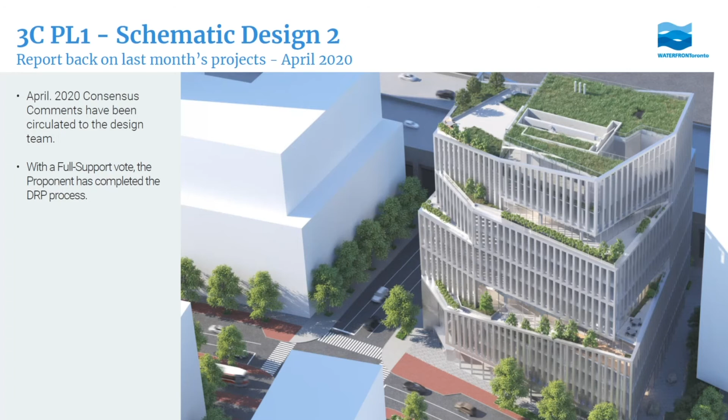Next slide, please. And the Port Lands flood protection, the parks, that was also a detailed design review. And we also gave them a vote of full support. So again, they won't be coming back to the panel because they have finished the process.

The only caveat there is if something changes dramatically again, because this project has had to change a couple of times in response to geotech conditions discovered during excavation. So if there's a big shift, it has to be addressed, I hope there isn't, because we're going to run out of budget for this, but hopefully we don't have to do another redesign. If we do, we'll bring it back, but if not, I think they are also finished.

So good, we gave 2 thumbs ups to final projects last time. Next slide. And then I wanted to talk about Quayside.

I'm not going to read what's here, but this is some excerpts from the statement that Steve Diamond made. I think Sidewalk has decided to pull out of the Quayside project.

It's disappointing on a number of levels. I feel that as we worked through the process with them, the project was getting more and more shaped into something that we were starting to feel really excited about. I feel like we were addressing a lot of the privacy concerns, and at the same time getting the public realm proposals much better aligned with Waterfront Toronto's position on public realm.

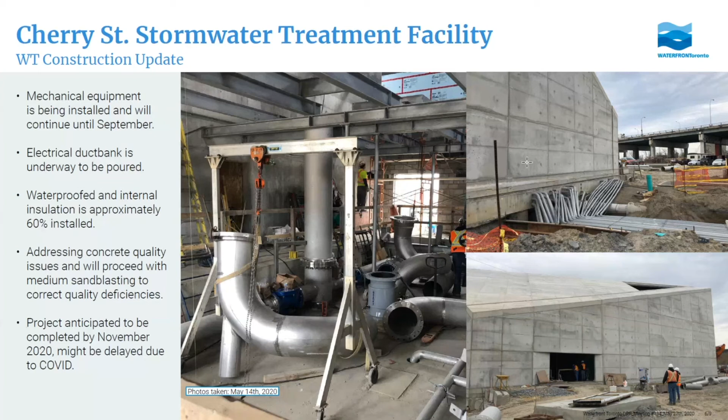And this was something that was actually recommended by the panel that we pilot this. And Sonia on our team has actually worked really hard at getting us some grant funding for this and getting city staff through the approval process. So while it is small, it has been a pretty significant feat. I'm actually very excited that we're testing this out.

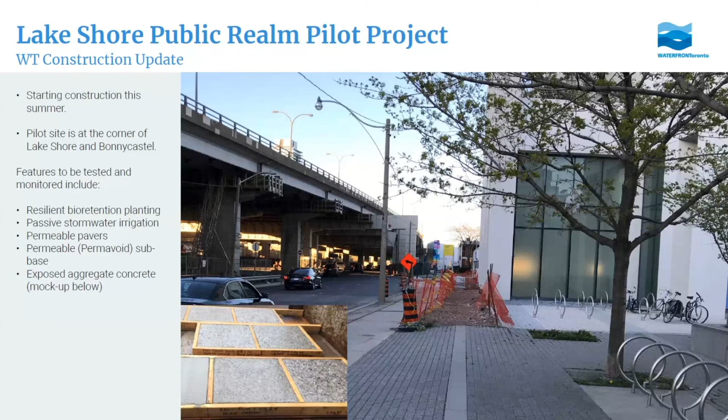For the Contact photography, we were lucky enough to be selected, or who was selected was Vid and Ryan, who are the two photographers we hired to photo document the whole PLFP project. There's a large-scale temporary public art installation meant to go up on the Essroc silos and the median along Villiers. Unfortunately, the real-life version of this exhibit has been postponed because of COVID. The Contact has created a website now for all of the exhibits so they can all be experienced virtually.

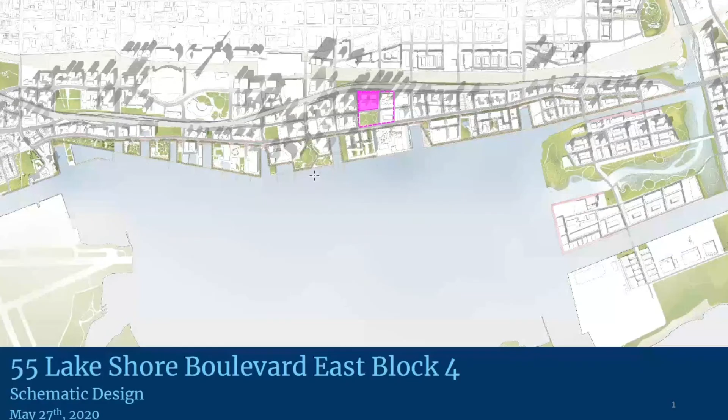Okay, so over to you, Carolyn, if you're ready. Good morning. My name is Caroline Kim, and I am the Urban Design Project Manager for Waterfront Toronto. Today's project discussion will be on Block 4 for 55 Lakeshore Boulevard East. The proponent is Menkes, and the design team includes Architects Alliance, NAK Design, and GBCA. This project is in the review stage of schematic design. I also like to note from the city, I have Nader Kadri, who's the community planner for this application, and Ran Chan, the senior urban designer. Next slide, please.

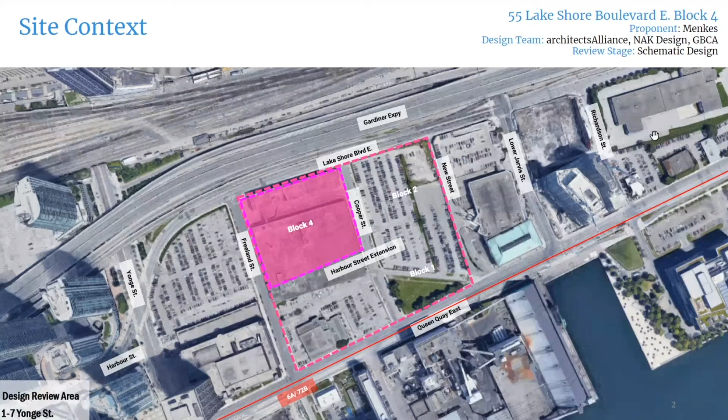Block 4 is located between Lakeshore Boulevard East to the north, Cooper Street to the east, the new Harbor Street extension to the south, and Freeland Street to the west. It is the final of the 4 blocks, with Block 1 located in the southeast quadrant, Block 2 in the northeast quadrant, and Block 3 in the southwest quadrant, which will be the city-owned park. Next slide, please.

Block 4 is known as LCBO lands for housing the existing LCBO building, and that is listed under the Heritage Register. The proposed massing is in accordance with the approved settlement in 2018 and is in full compliance with the site-specific zoning bylaw. Block 1 came to the DRP last November 2016, and Block 2 was not reviewed. In terms of the project timelines, in September 2019, an OPA and zoning LPAT order was issued. In September 2019, the SPA submission. In the first quarter of 2022 is the target construction start, and 2027 is the target construction end, which is approximately 5 years. Next slide, please.

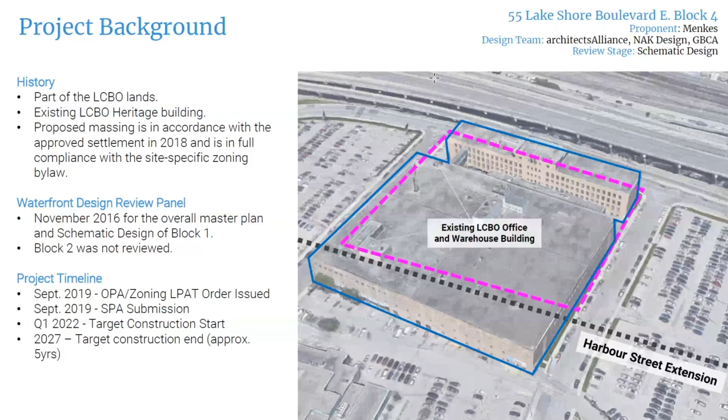In terms of the project background for Block 4, with regards to the towers, there are 3 residential towers with a height of 79, 87, and 90 stories, 2,705 market units, and 196 affordable units. The towers are set on top of 2 mixed-use podiums with various preserved and reintegrated elements from the existing LCBO office and warehouse building. With regards to the podium, the north podium contains the residential lobbies and amenity spaces for the market condo units and the affordable housing units.

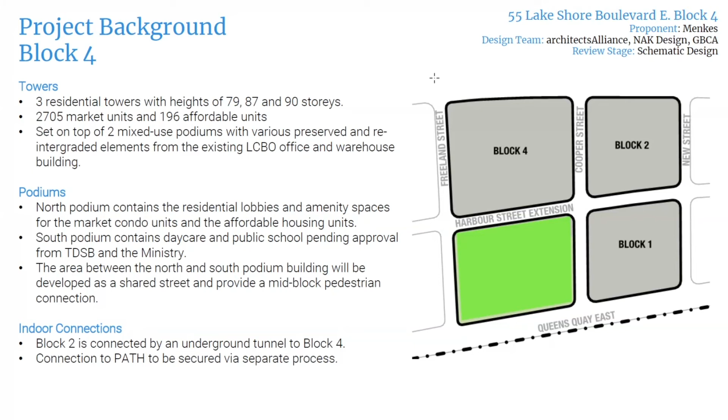The south podium contains daycare and public schools, which is pending approval from TDSB and the ministry. It should be noted that TDSB will require approval from the Ministry of Education with regards to not being able to meet the requirements of providing exclusive outdoor use. The area between the north and south podium buildings will be developed as a shared street and provide a mid-block pedestrian connection. In terms of the indoor connections, Block 2 is connected by underground tunnel to Block 4, and there is a connection to the PATH to be secured via separate process. Next slide, please.

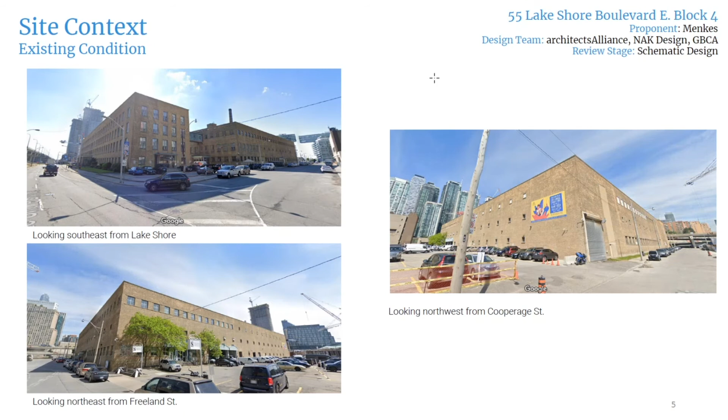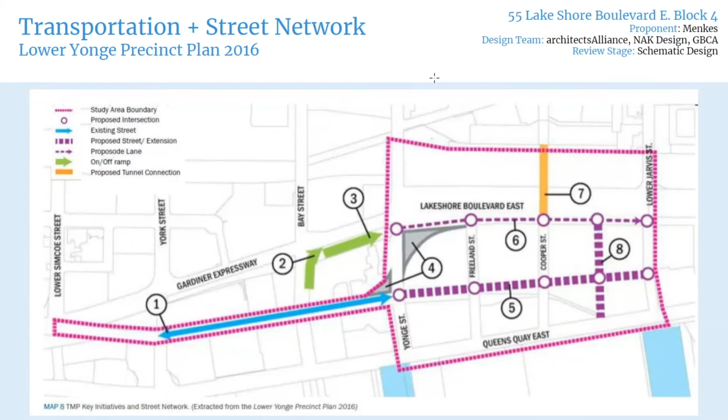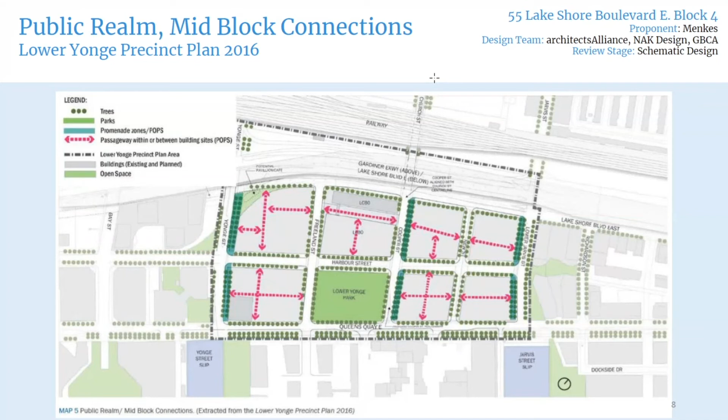And this is again from the Lower Yonge Precinct Plan 2016, the public realm with mid-block connections. As you can see in Block 4, there is the Heritage Mews that is being proposed between the existing 2 buildings, the warehouse and office. Next slide, please.

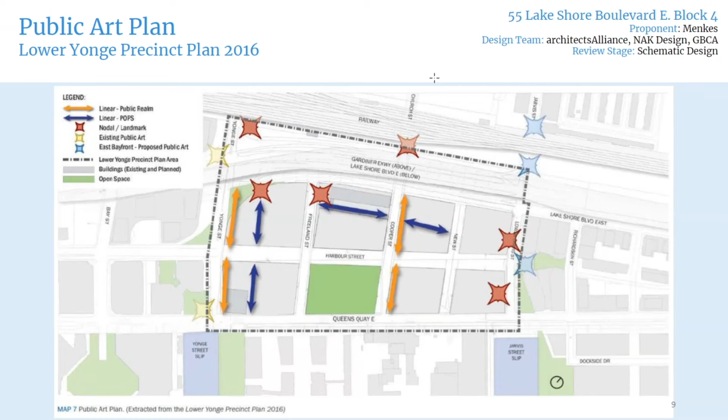Public art plan, again from the Lower Yonge Precinct Plan, allocates nodes and areas of public art to be considered. Next slide, please.

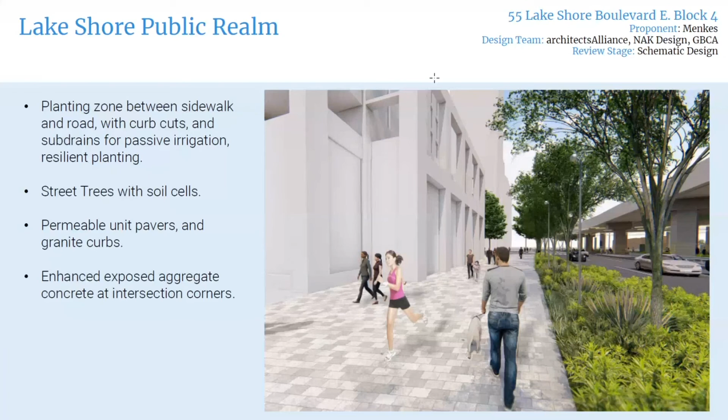And this is the Lakeshore public realm. The planting zones between the sidewalk and road with curb cuts and subdrains for passive irrigation and resilient planting. The street trees with soil cells, permeable unit pavers and granite curbs, and enhanced exposed aggregate concrete at intersection corners. It should also be noted that this is the ultimate condition and that this is being led by a separate process with Waterfront Toronto and the city.

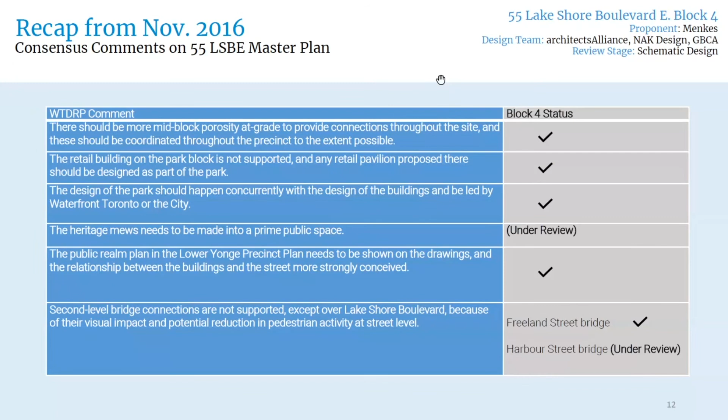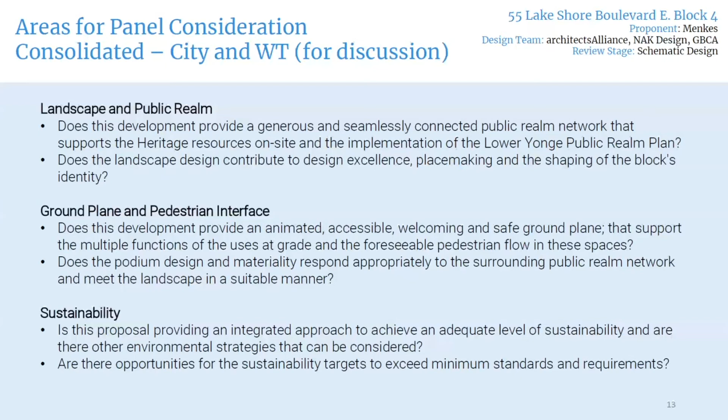And now I will turn it to Peter Clewes from architectsAlliance. Thank you, Caroline. So I'll try and go through this quickly—there's a lot of information here. I also have with me today, virtually, Craig McIntyre from EQ, Sabella from NAK, and Chris Boigel for Heritage. So as Caroline said...

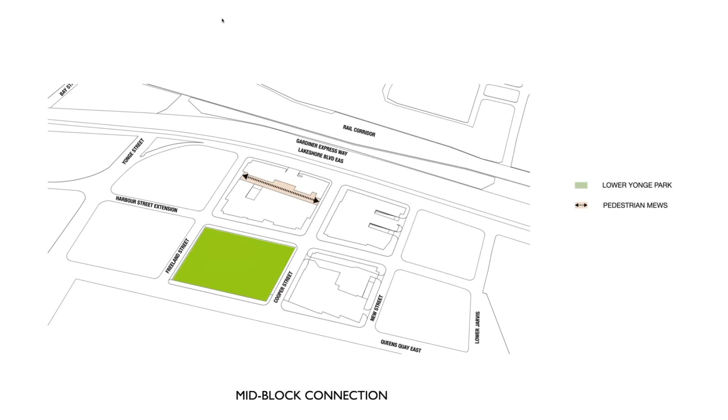This was last reviewed 4 years ago, which is quite extraordinary—it was the master plan development. Subsequent to that, we made a series of changes on that master plan, the principal one being, as Caroline said, the introduction of the pedestrian mews from Freeland to Cooper Street.

Just by way of context, because it's been 4 years since the panel, and some of you were on the panel at that time, some of you were new, I just want to give you a bit of context in terms of what the precinct plan called for.

It asked for a balance of residential and non-residential uses, including employment, with at least 25 to 40% non-residential. Harbour Street would be designated as a principal retail street, with a mix of residential unit sizes, tenure, and affordability. That is all being done now: there is an office building under construction on block 1.

There's a school going in, there's affordable housing and so forth, which I will get to. The other tricky part of this project is the interconnection with the path system, limiting connections at grade or below grade with the exception of Lakeshore.

In terms of the path system, as Caroline mentioned, we are proposing an over-street bridge on Freeland. That's because there's a community center being built in the Pinnacle project to the west, and the school intended for block 4 needs to share those community facilities such as gymnasiums. The school board and other officials feel it's paramount that there's a bridge there, so it's currently shown on our design.

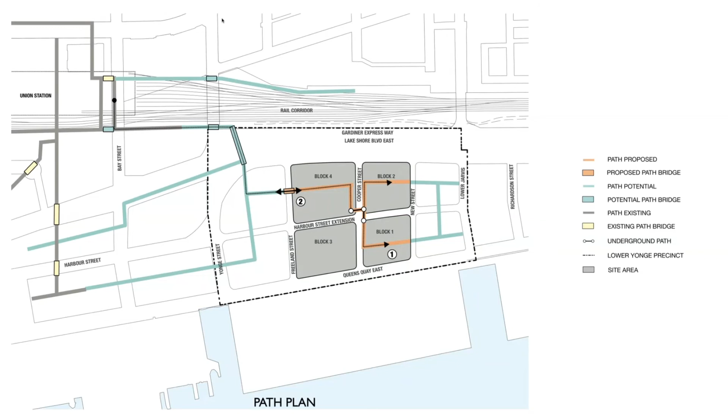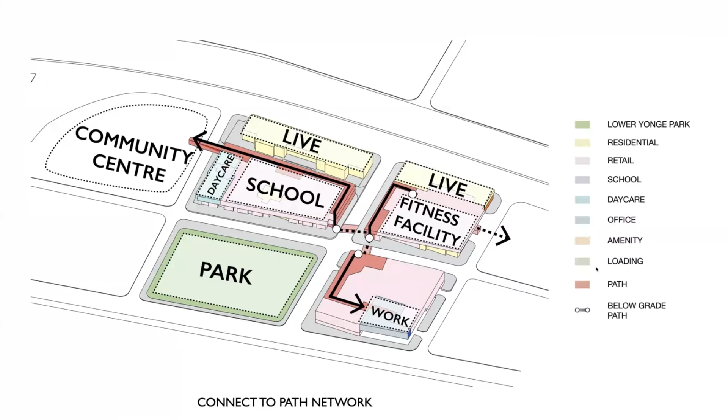So really the way this works is you come in from the west, above grade, notionally on the 2nd floor, you move eastward across block 4, and then you take an escalator down to grade and below grade. You can either transit across Cooper at grade or below grade into block 2, where you pop back up, or you stay down and pop back up into block 1.

Also part of the context, this was all laid out in the precinct plan in terms of base building heights and articulation of those base buildings and pedestrian weather connections and so forth. These are the heights we're proposing in all 3 blocks that comply with those base building heights, ranging from 17 meters up to 38 meters on Lakeshore Boulevard.

Then there are tower heights and transitions that the precinct plan asked for, generally a height transition down as you move eastward and southward. The tower locations were already largely determined by the precinct plan, 3 on block 4 and 2 on block 2. These are the proposed heights, from a height of 299 meters down to 219 meters on block 2.

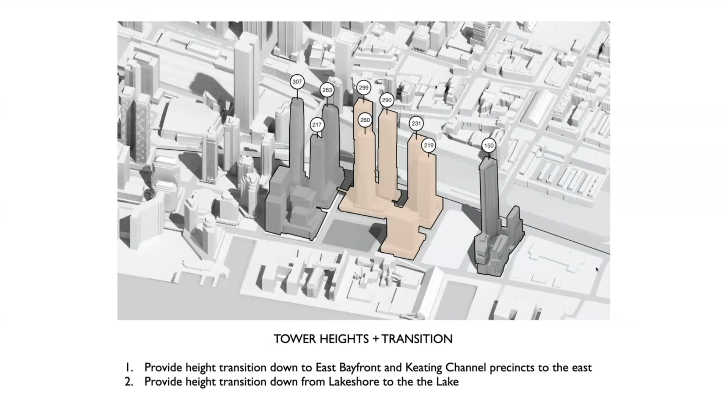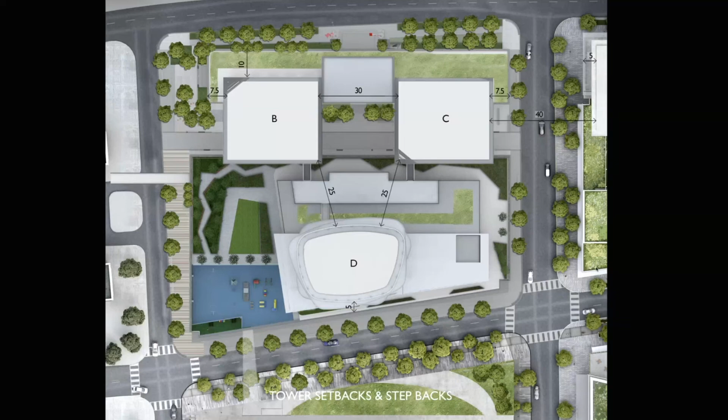Tower setbacks, step backs were required from Harbour, Lakeshore and Freeland, and also 10 meters from any heritage structures. So focusing on block 4, essentially what we're proposing here are 3 towers: towers C, B, and D.

Towers B and C, which are the taller of the 3 towers, are proposed to be separated by 30 meters, and then a 25-meter tower separation to the tower to the south, which is lower and fronts onto Harbour Street.

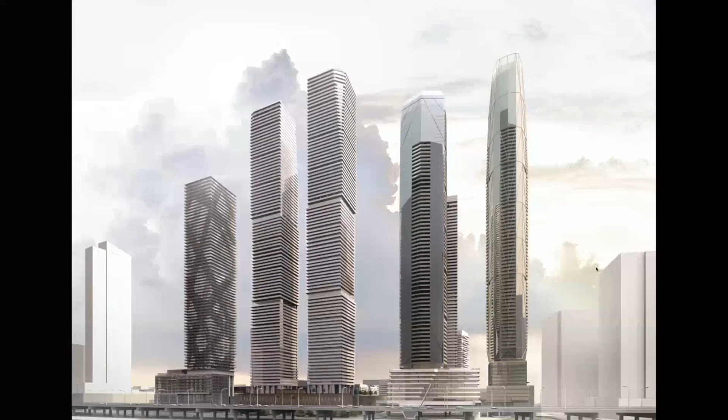This is a massing diagram shown in context with the Pinnacle development to the west, showing the various heights of the buildings, from the southeast looking northwest. You can see the 3 towers proposed adjacent to the Pinnacle development, and then the 2 towers currently under construction on block 2, the ones with that kind of graphic pattern on the balconies, and of course the office buildings under construction.

Another precinct plan requirement was that loading access be limited to Freeland and the so-called New Street, which is the street on the east edge of the precinct, and to limit that loading access to 6 meters and minimize the number.

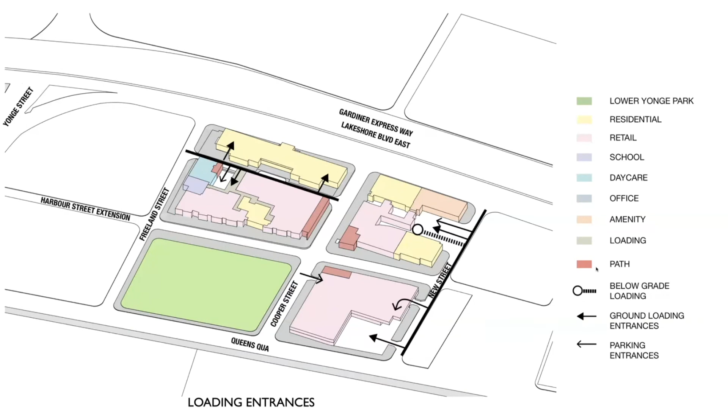So what we're proposing is to have the principal loading, which is now currently under construction, below grade, accessed from the east side of block 2. Trucks drive down a ramp, and there's a whole below grade loading area servicing blocks 1 and 2, and also block 4. Block 4 also has some limited loading and vehicular parking access off the heritage mews, which I'll show you shortly in some plans.

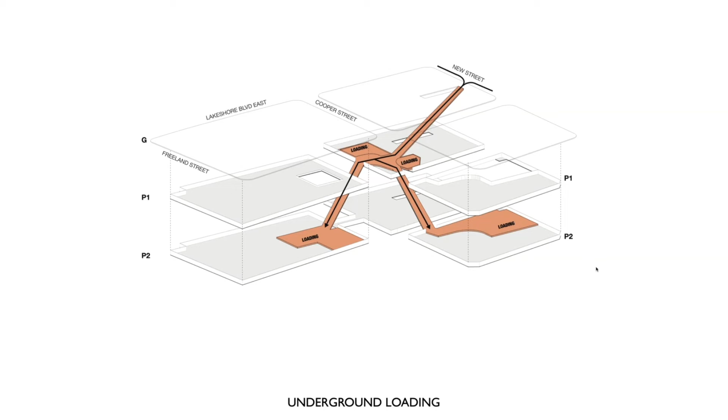This basically just shows you a schematic of how that works. Trucks come down New Street on a very long ramp. There's a principal loading area under block 2 at the P1 level. Trucks can also continue down to the P2 level under block 1, the office building, as well as P2 under block 4.

There were requirements for ground floor animation, activated uses at grade, a series of minimum percentages of building faces, minimum ground floor heights, minimum widths for lobbies, and facade articulation, which I believe we are adhering to. You guys will be able to judge that.

In terms of the overall organization of the precinct, the pink areas are publicly accessible retail areas. To the extent we can, we've put all the retail on Harbour Street and on either side of Cooper Street. Lakeshore Boulevard is the light yellow area for residential lobbies, as well as limited lobby exposure on Harbour and on New Street to the east. The last area is a daycare and a school, which have access off Freeland Street on the west side of Block 4.

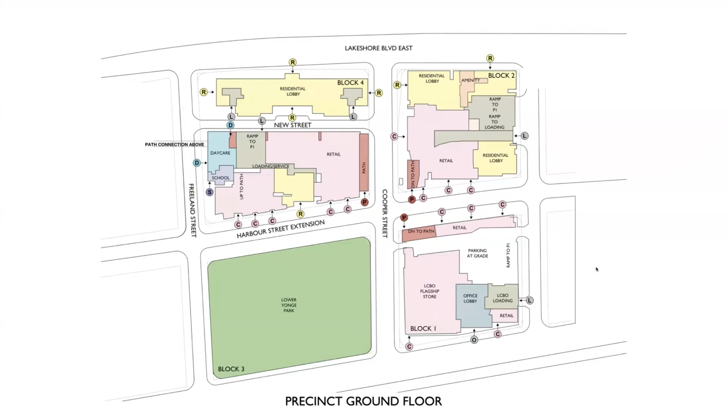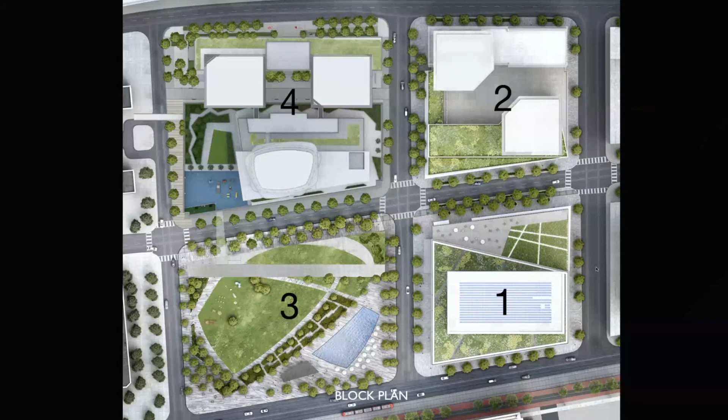This is a composite aerial rendered view of the four blocks with the park. As Caroline said, the retail pavilion proposed four years ago on the southern edge of Harbour Street, adjacent to the park, has been removed. That parcel of land has now been vended back to the city to expand the park, and there's potential, still under discussion with the school board and others in the city, for a bridge leading from the school to that park, though that's yet to be determined.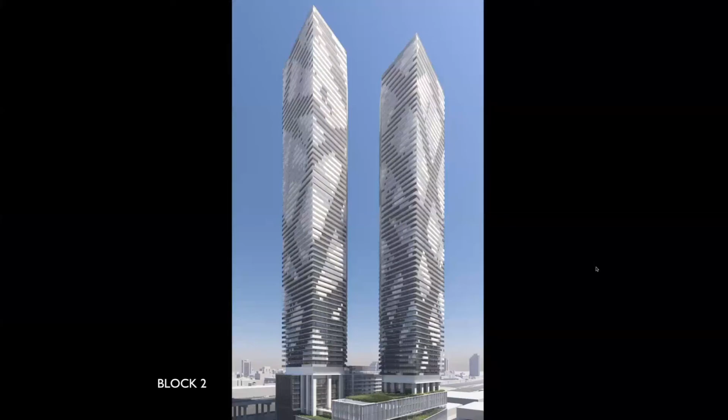What's under construction now was approved with Block 1, the office building — I think the superstructure is largely completed. Block 2 is a project we're doing that's under construction, with the podiums currently at about the third level structurally, so there's a long way to go. And so on to Block 4.

As Caroline said, one of the challenges of this block is that it's essentially completely occupied by two heritage buildings, complicated further by the alignment of Harbour Street, which is essentially taking off the southerly third of that warehouse building. So let me give you an idea graphically of how this block is organized, because it's a very complex set of different uses.

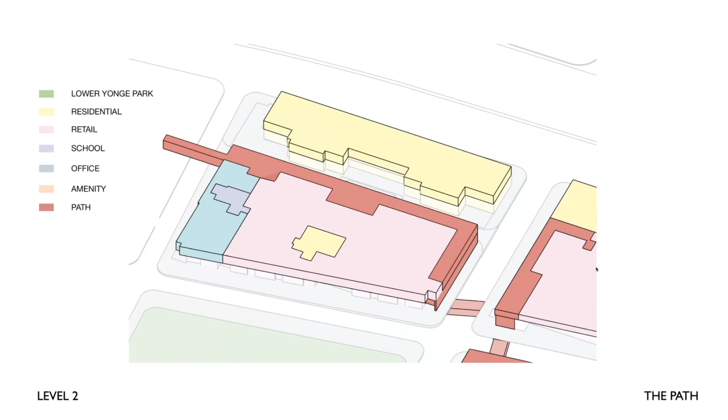We have residential lobby uses at grade, wrapped around with retail, then a school entrance off Freeland Street and a daycare to the north of that. The path connection comes through on the second level of the podium, also with second level retail, the school, and second level residential. The school really starts on the third level with residential to the north, amenity on the fourth level with residential to the north, and then the residential towers above.

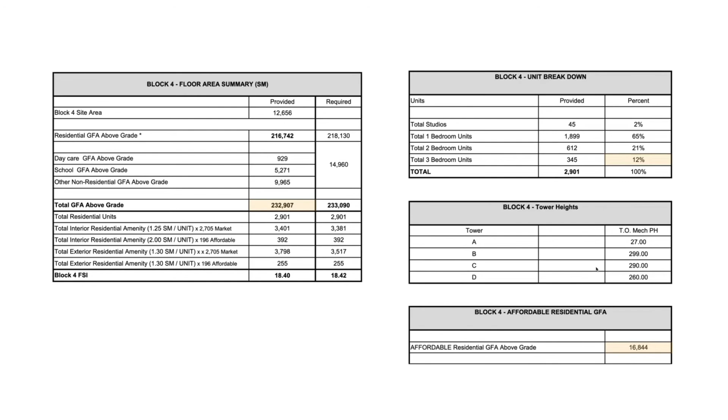I won't get into this — statistically, a lot of this has been dealt with already. Suffice to say that the entire project density on this block proposed right now is about 230,000 square meters. So it's a very, very large project.

These are more detailed floor plans showing the organization of the block. We're proposing a ramp down to P1 off New Street, a heritage mews running between the two heritage buildings. We're also proposing a loading dock — labeled L on this drawing — three loading docks total, two on the north side and one on the south. There's a residential lobby entrance to the north building and retail exposure on the south end, as well as the daycare wrapping around. We're trying to animate all the ground floor faces of these buildings, particularly on Harbour, Freeland, Cooper, and the heritage mews, as much as programmatically possible.

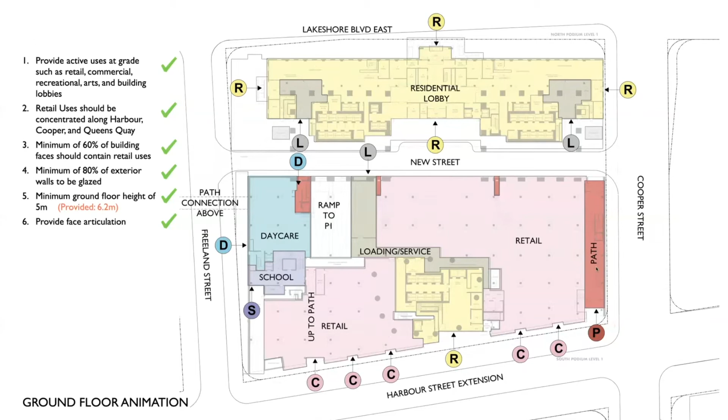So, ground floor plan: retail, daycare. I'll go through this quickly since it would take hours to cover properly. Second floor with retail — the daycare occurs on the second floor at the west side with an exterior play area adjacent, and the path bridge connects into this from the Pinnacle development to the west. There's a path connection that transits along the north side of the podium, then turns south and goes down a set of escalators to grade. There's also an original heritage bridge we'll be maintaining that connects back to the existing heritage structure to the north, currently LCBO's corporate offices. That building will be converted into an affordable housing project, with the residential cores of the two towers punching through it.

Up on the 3rd floor is the elementary school that basically runs around the perimeter of the building, with an exterior play area carved out in the southwest corner. The interior of this plate, because it's very deep and not particularly useful for the school, will be given over to residential storage. Again, to the north is the affordable housing project.

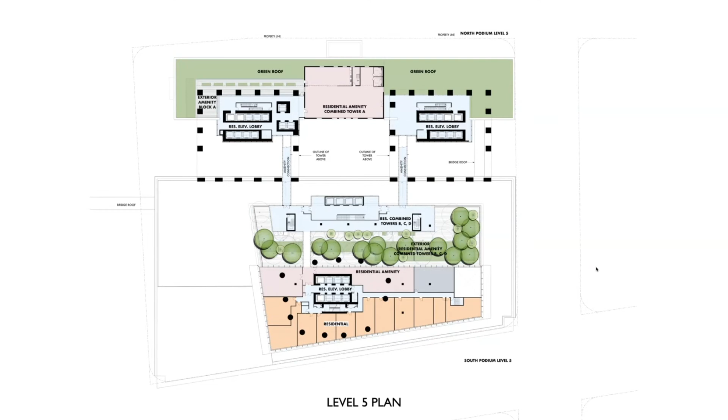When you come to the 4th level, there's a combined residential amenity area for all 3 towers, indoor and exterior, with a series of bridges that connect back to the towers to the north over the Heritage Mews. Level 5 has more residential amenity as well as some residential to the south, completing the podium on level 6, and then we move into the towers. The tower separation distance is 30 meters to towers C and B, and 25 meters to tower D.

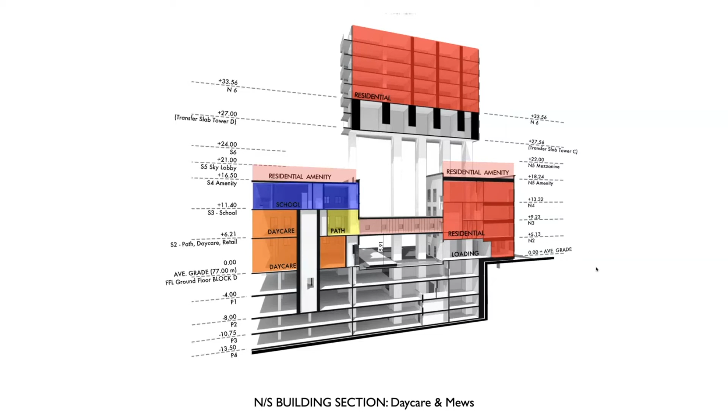These are isometric, diagrammatic sections trying to help you understand the complexity of this project sectionally. This is looking through the Heritage Mews Street, looking west. You can see the Heritage Bridge connecting into the residential to the north, which will occupy that LCBO building, and then the various facilities, daycare and so forth, to the south.

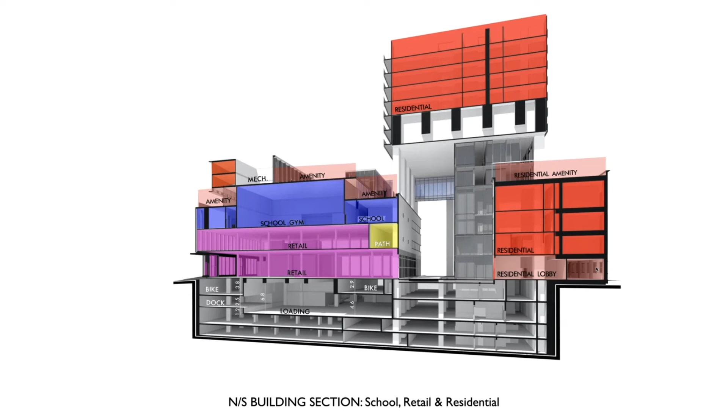Suffice to say, where the towers come in on the north, what we're trying to do is lift those up as high as possible to allow the heritage buildings to read volumetrically and visually. We're putting in a massive transfer system, two stories high, above those buildings to transfer the tower structure down into a more organized column structure that will go through. To the extent possible, we're trying to create as much visual and physical porosity through the Heritage Mews.

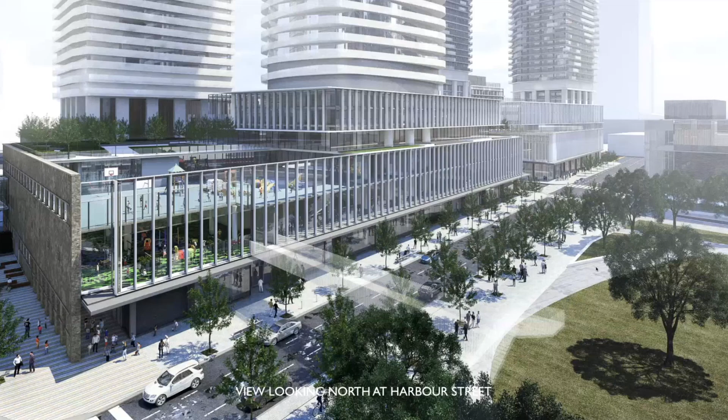Now, coming to the overall architectural expression, because we're dealing with most of the facades of this block being heritage facades, there's very little intervention we can do, and I'd be interested in the panel members' comments on that, because we are proposing some minor interventions, particularly on the south face, because that facade is being removed.

We've chosen to essentially glaze the entire southern face of this building to really make a clear visual delineation between what is new and what is existing in terms of the heritage buildings.

The potential bridge has been ghosted in over Harbour Street. That's a bridge of some discussion with TDSB and others, whether it should be in or not, or whether there should be a crosswalk at grade on Harbor, and I'll leave that to others to decide in the fullness of time. This also shows, on the southwest corner of the building, where we're carving out exterior areas both for the daycare and the elementary school on the 3rd floor.

Just a more detailed shot showing continuous weather protection for the retail at grade. Again, what we're trying to do here is create as much transparency and animation as possible to the southern face, with 2 levels of retail.

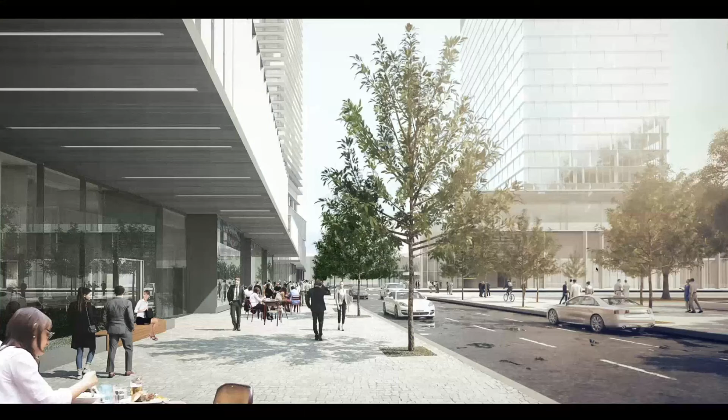Just viewed from Harbor, to the south of the park with your back to it. Again, the bridge ghosted in, the potential bridge, and the continuous weather protection with a widened sidewalk along the north side of Harbor.

Then coming around to the eastern side of the block, the heritage facade makes an appearance. What we're proposing here, if you recall, is where we're having proposed escalators coming from the path down to grade and then continuing down below grade. We're proposing a series of openings in that warehouse facade at grade to try and create a greater sense of visual porosity to this facade.

It's a very opaque, almost rationalist facade from the 40s or 50s, so again I'd be interested in commentary on whether that's a good thing to do or not. These are just more detailed elevation drawings showing how we're proposing to do that.

Similarly, on the west side of the block, we have the proposed entrance to the elementary school. We're proposing here to carve into that facade with a series of almost colonnaded openings, to create more visual and functional porosity through that facade into the entrance of the school, as well as the daycare to the north. Sabella will get into the whole ground plane treatment proposed here in a moment.

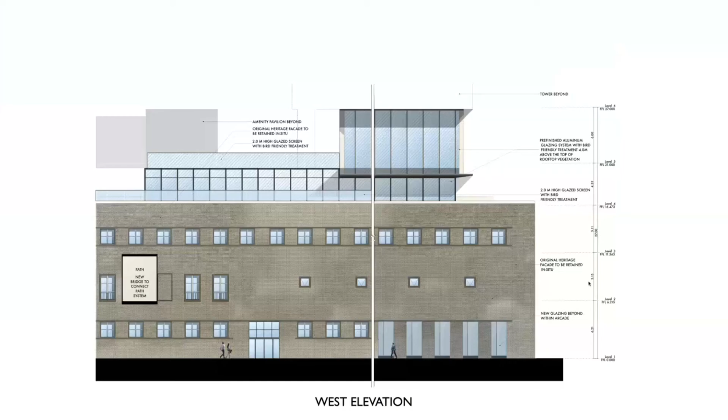Accompanying elevation drawing, looking down the heritage mews, what we're trying to show here is, to the extent we can, given the very, very large buildings, how we're trying to, as gracefully as possible, transfer the structure of these 300-meter buildings down and thread them through both the heritage buildings and the mews running through.

You can see on the right-hand side of the image, the bridge coming in from the Pinnacle development to the west, accessing the school and daycare and the path connection. And you can also see the heritage bridge that we are reinstituting, threaded through the columns of the tower above.

This is more, and Sabella will talk about this in a moment, a whimsical idea for the northwest corner where there's a wider public realm given the existing setbacks of those heritage buildings. There's a possibility for public art here.

As you complete the tour around the block and come to the northwest corner, the LCBO office building's facade will be completely retained and restored. The windows will be reconstructed and form basically glazing for the affordable residential housing project.

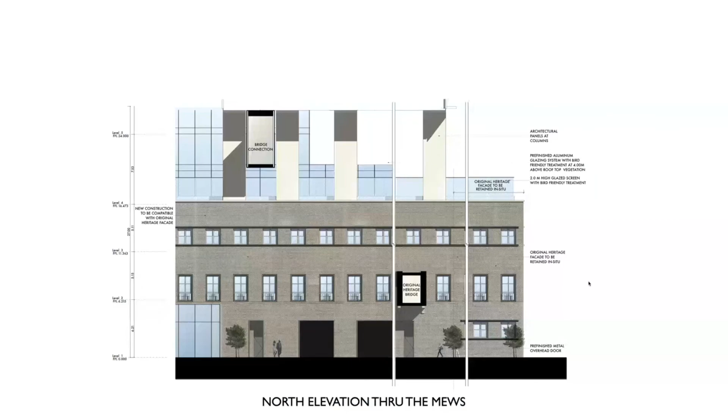Then finally, going through the heritage mews, what we're trying to do here is animate it as much as possible. This is the residential lobby entrance into the LCBO office building from the north side.

So there would be a residential drop-off here. As well, on the north side of the warehouse building, we're trying to open up the retail so that it has entrances and visibility into that laneway.

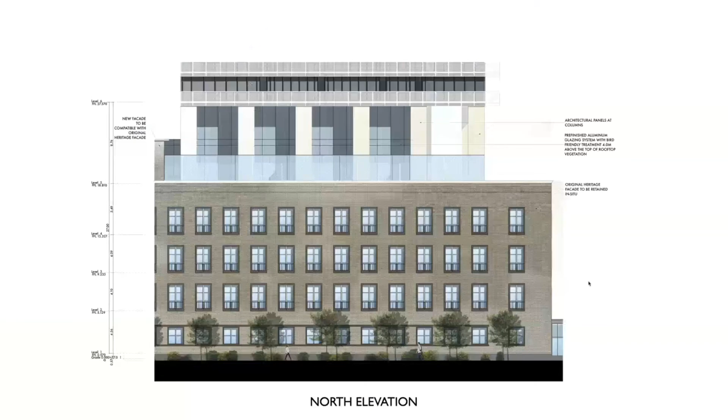So I'm going to now turn it over to Sabella, who will talk about the public realm design, and then I'll come back to sustainability.

Sabella, are you there? Yeah, I'm here. I can be your slide changer for you.

Okay, great. So for the most part, the boulevards within this precinct have been designed according to the Lower Yonge Precinct Concept Plan, incorporating wide pedestrian clearways, street trees, furnishing zones, and waterfront standard concrete paver.

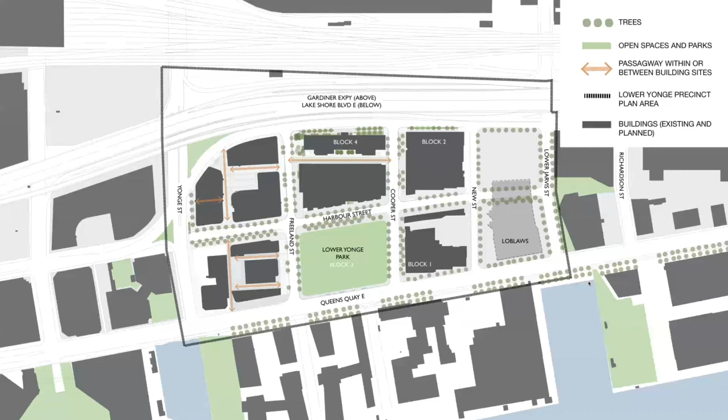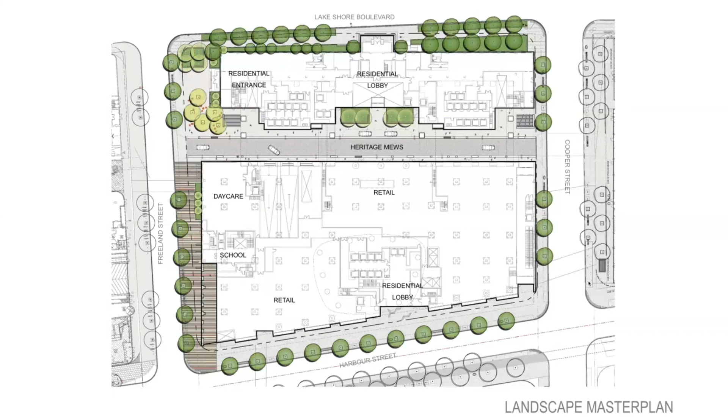Harbour Street along the south of this block will have a 5.25 meter pedestrian clearway and a single row of trees. Along Cooper Street, because of the heritage facade, the clearway is only 2.1 meters, with a single row of trees. The entire boulevard will be paved with the gray Silex waterfront standard paver, as specified in the Lower Yonge Public Realm Concept Plan.

Along Lakeshore, we followed the vision from the Gardiner East Public Realm Study and have incorporated wide, long planters against the curb and porous permeable paving. The space along Lakeshore varies, with about 6.5 meters at the west end and just over 11 meters at the east end, so it's quite tapered. In the center, where the entrance is, the canopy and walkways create a very narrow area.

So we've introduced a 2.1 meter walkway that works around the entrance and heads west towards Freeland Street. On the south side, we've added planting. On the east side, we've been able to add a second row of trees. And on the west side, we've added larger shrubs and understory planting.

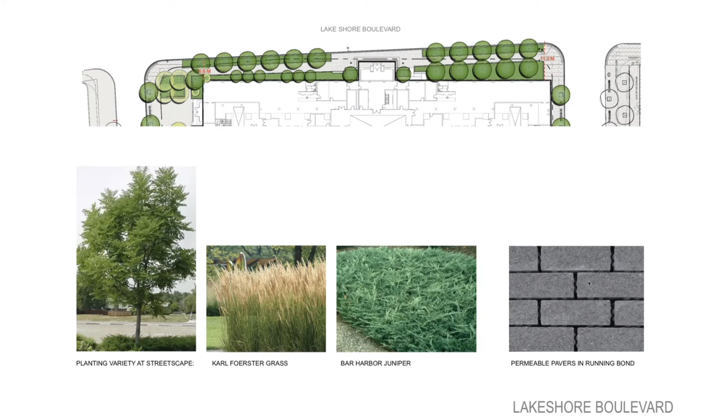So along Freeland Street, we have a variety of relationships here. At the north end, there's close to 18 meters from the building face to the curb. Further along the south building, the setback varies from about 6.5 meters at the south end to 10 meters at the north end. According to the guidelines, this area is to be paved in concrete, and we feel there's a lost opportunity here. We feel there are some really great spaces here, and that better paving would certainly help animate this area.

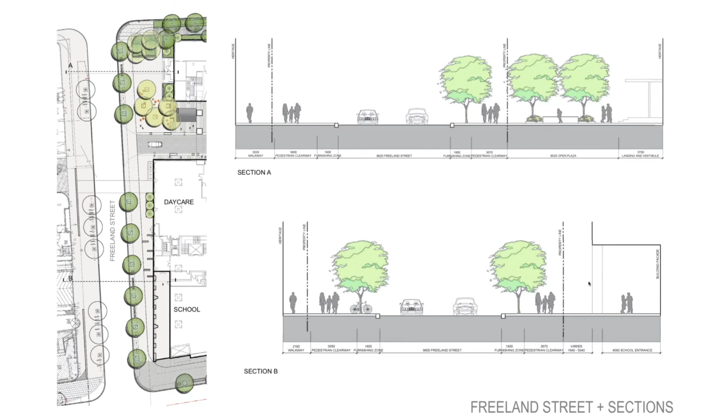So at the north end, we feel this could be a great little plaza. We've added a big planter at the north end to shelter it from Lakeshore, and then added a grove of trees with movable chairs and tables to create a flexible area for lounging. We feel this is a great place for art to occur, and we'd like to introduce a light gray mottled paver to create more character in this area.

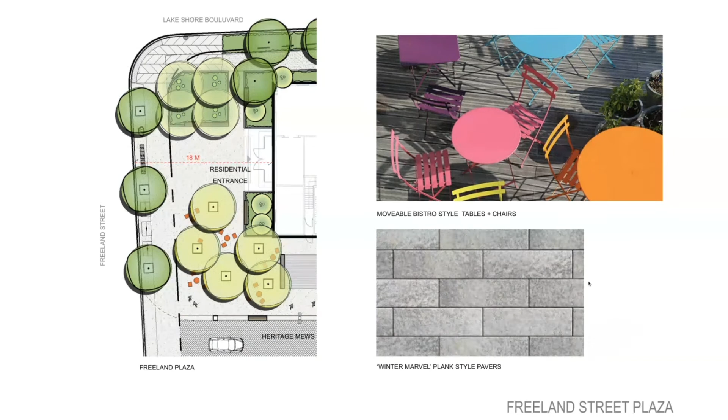The southern part of Freeland has a more dense facade with smaller windows, yet it contains the opening for the entrance of a daycare as well as a school.

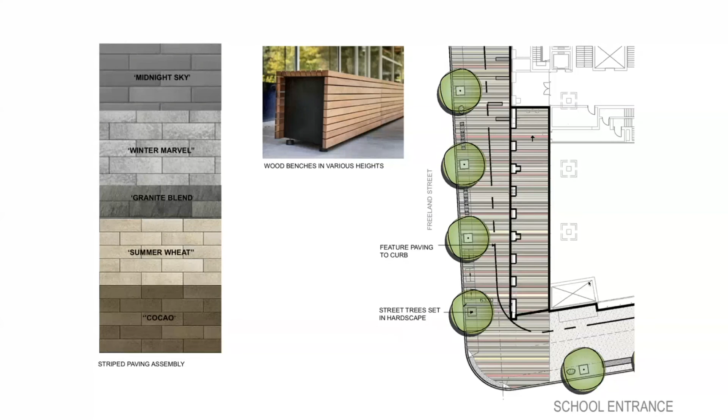We wanted to help animate this area with striped paving to create a more interesting zone. We feel those stripes could be useful in penetrating through the openings in the facade to announce where the school entrance is. This paving would be playful and indicative of the school zone, and we'd like to carry it further south to Harbour Street to the curb, possibly extending it to show a school crossing to the park. Along this frontage, we've also introduced wood benches of varying heights for school children and parents to gather.

We feel the Heritage Mews can act as a great woonerf-like experience and provide the mid-block connection between Freeland Street and Cooper Street. There is a designated driving zone in the center, 6 meters wide, defined by special pavers. On the edges, there's a furnishing zone with concrete planters and lights to help keep cars within that space. Pedestrians will be free to move wherever they like within the space, so it'll be a shared street. On the right, you can see the image of the light we are proposing along this stretch.

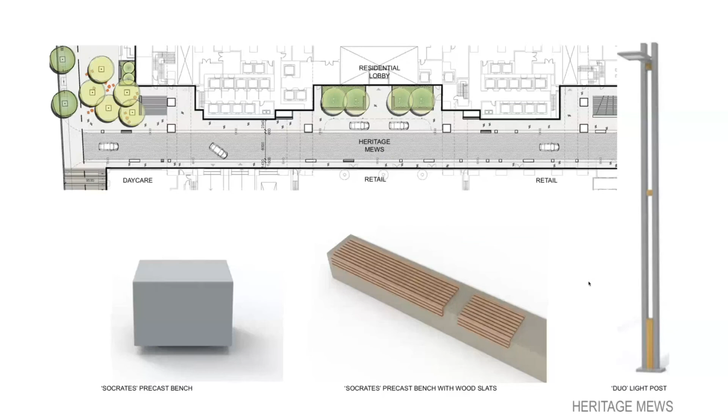These are different types of pavers. We are introducing a herringbone pattern in the driving lane, a wider, darker charcoal band along the furnishing zone, and then that lighter paver suggested earlier for the plaza would extend through the whole Mews, defining the pedestrian area.

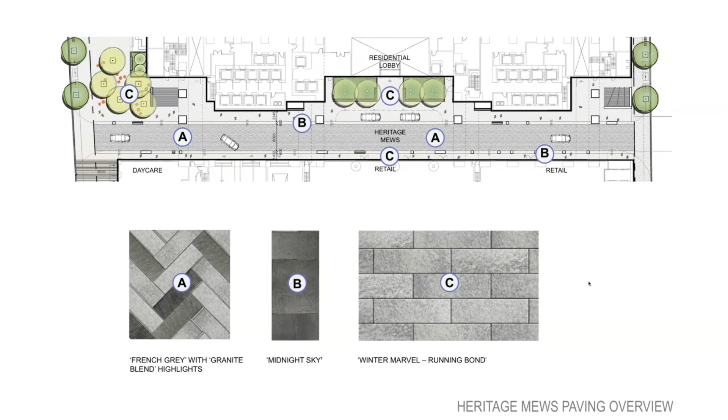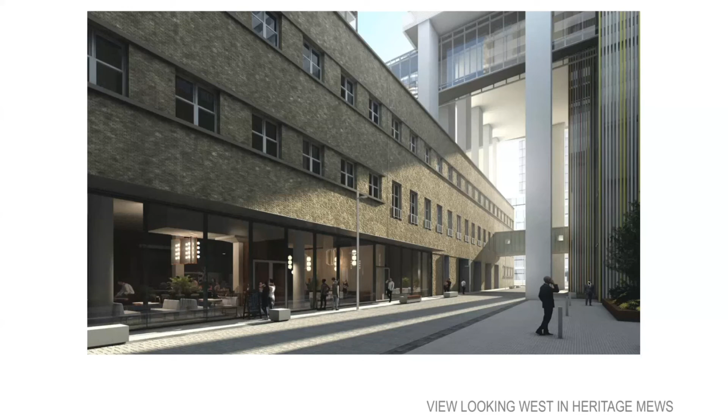This is a view again looking west through the Heritage Mews at the retail area, showing the benches and the light standards.

In the center of the Mews on the north side is a residential entrance, and there will be sunlight in this area in the summer months, late morning and early afternoon. We've introduced large planters to provide more of a residential feel here, and extensive benches along the front. The planting will be blue beech trees and shade-tolerant shrubs and understory plantings such as hostas and Japanese fountain grass.

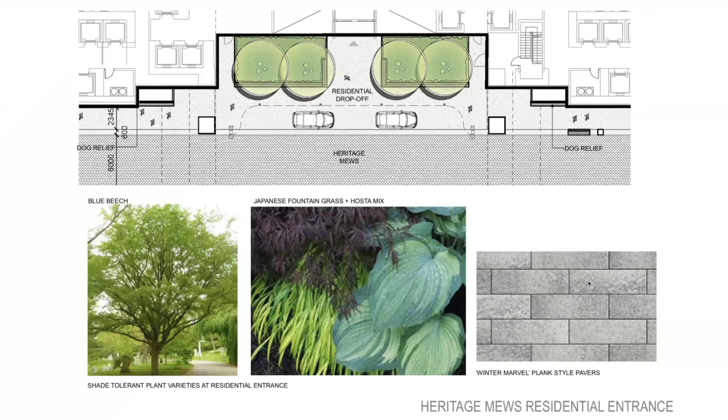Here's a view showing that entrance with the Japanese fountain grass and the benches in the foreground.

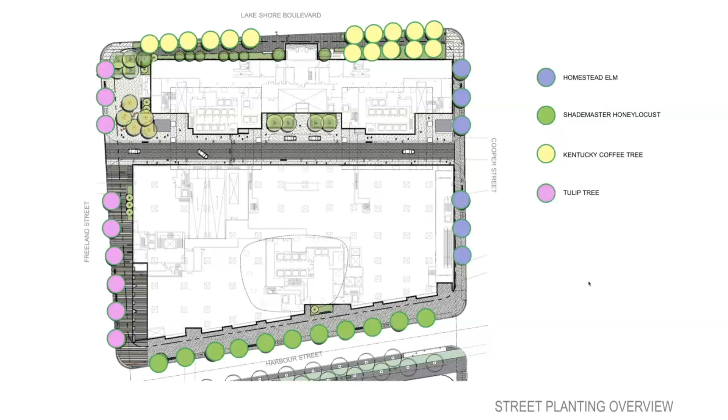The strategy for the street trees is to try to have a monoculture on each street. We're looking at homestead elms on Cooper Street, Kentucky coffee trees along Lakeshore, tulip trees for Freeland Street, and shademaster honey locust for Harbour Street. We'd also like to introduce river birch within the plaza that people can sit underneath.

Peter, that's the end of my presentation. Thanks, Sabella. So I'm going to briefly take you through some points put together, particularly by Craig McIntyre, on sustainability, but then Craig will be available for questions and comment as we go through.

From a sustainability perspective, our client is proposing to achieve TGS version 3 tier 1, meeting the bird-friendly requirements of tier 2, and somewhat influenced by Waterfront Toronto's minimum green building standards, including electric vehicle infrastructure, cycling, connectivity, and green roofs. They are looking at connection with the Enwave District Energy, though no decision has been made at this point. The building will have all suites sub-metered as part of a smart building using high efficiency appliances, bird-friendly glazing in the lower portions of the building, long-term flexibility in terms of ground floor heights and structural design, and 3-stream recycling.

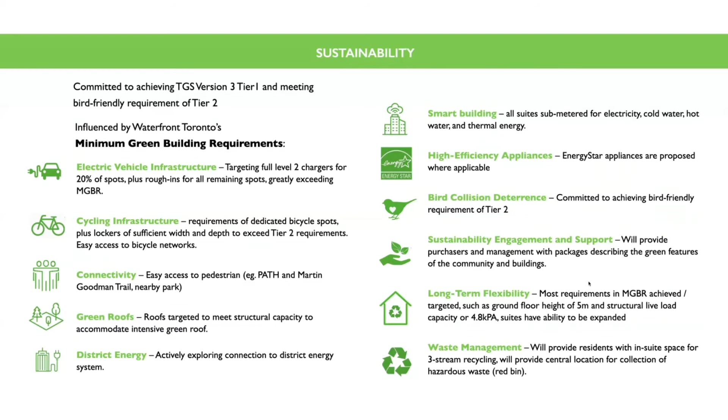I want to talk about sustainability, or flexibility. This is early days, but one issue with shear wall construction, as many of you are familiar with, is that while it's a very efficient form of construction for lateral stability in tall buildings, it creates inherent inflexibility in long-term design. For example, I live in a building I designed, and I wish I had put openings in the shear walls so I could expand my unit. So what we're proposing here is to do that.

This is more of a diagrammatic approach to how that might work. The current market, who knows what it is now with everything going on, but earlier this year it was still fairly small, affordable units. If that changes over time and people remain in the building wanting to expand, we're going to try to create a way in which you can start to convert units.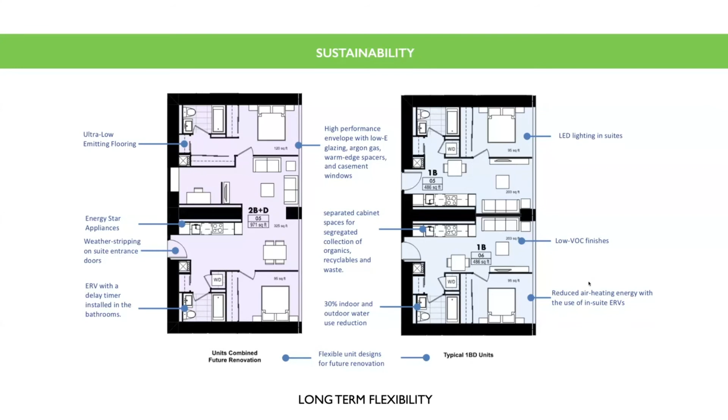One of the things we're proposing under SB12, the Ontario Building Code, is 60% glazing to these buildings. You probably know I'm a big fan of glazed tall buildings. This slide is just to put tall buildings in context, since so much has been talked about both the amount of glazing and, as I'll come to, balconies and thermal bridging.

This is a simple diagram looking at three typologies: a typical detached house, a townhouse, and what I call a single aspect unit in a tall high-rise building. What's interesting is that from a perimeter envelope to floor area ratio, the detached house, considering its four walls, roof, and basement loss, is about 2.3; a townhouse, with its two end walls, roof, and basement, is about 1.5; and a single aspect unit in a high-rise is about 0.3. So these buildings are, by nature of envelope area to floor area, between 5 and 7 times theoretically more efficient than other residential typologies.

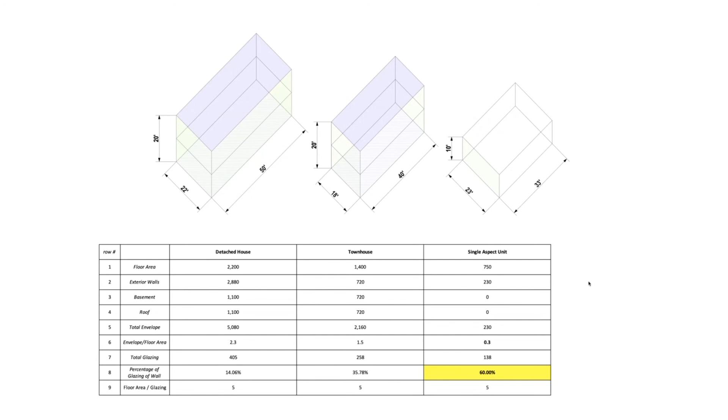If you extrapolate that to a townhouse and a detached house, it would mean a townhouse could only have 35% glazing on its end walls, and a conventional single-family house only 14%. So this is really to put in context the idea that fairly extensive glazing in tall buildings isn't necessarily an unsustainable idea relative to other forms of living.

The other topic is balconies, and those of you who know our work know I'm very fond of wraparound balconies for a number of reasons. One is that they provide greater amenity to the unit, particularly for passive solar shading. They also provide a physical and visual amenity, visually extending the space of the unit, as well as offering an area to get outside during clement months of the year.

I had the unusual experience yesterday of being on my balcony and watching, in real time, the shooting unfold on Peter Street, with people running and screaming — which was really quite horrific.

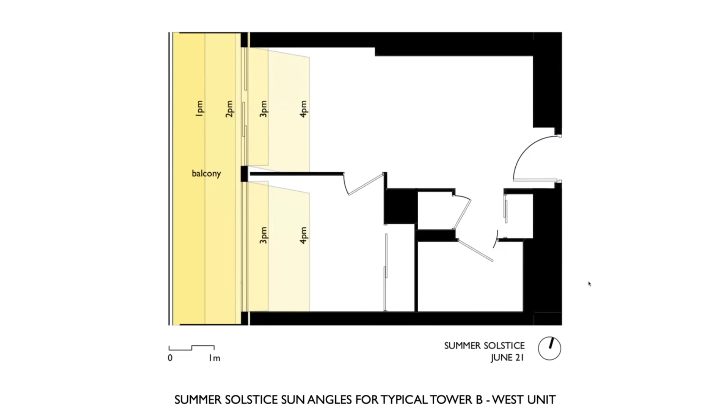What's interesting, and this has also been raised on other panels and projects we've brought forward, is the notion of thermally breaking these balconies and whether it's a good, sustainable idea to have balconies at all. This is a chart that Craig can speak to in more detail during the question period.

The interesting thing about balconies, heating and cooling, is that these high-rise buildings tend to be heated by natural gas, a far more efficient energy source than electricity, but they tend to be air conditioned by electricity. The Portlands Energy Centre, which supplies at least 25% of downtown Toronto's power, uses natural gas — so we have this curious situation of natural gas producing electricity. Anything we can do to reduce electricity usage, particularly for air conditioning, is a good thing, and balconies certainly help with that.

When you analyze this from a heating and cooling cost perspective — and I work for market developers, so this is market housing — the cost of putting in these systems and their payback is a very important consideration. I appreciate some may say cost shouldn't be a factor in sustainability, but in reality, I'd submit that it should be.

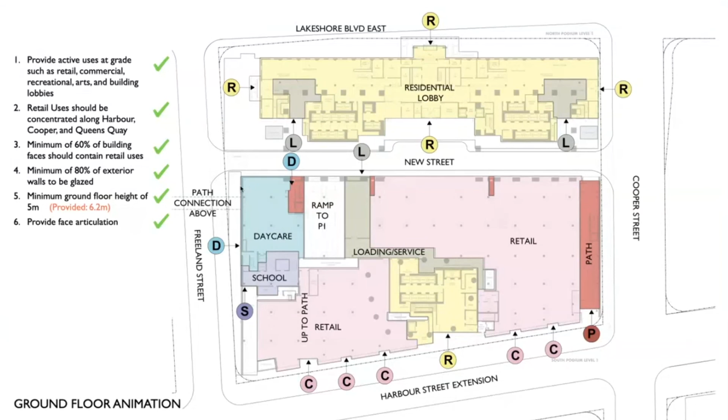The idea is to maintain in situ the east and west walls, and to potentially disassemble and reconstruct, although it's still to be determined, the north wall of the warehouse. So the central two walls of that new street are a decision you have made where the walls will come back in, maybe? Well, to a certain extent, yes. What the city is requesting is that the warehouse building remain in absolutely its current existing location, as well as the office building, where the city is offering flexibility on the southern facade of that office building. Also, I'm having trouble understanding.

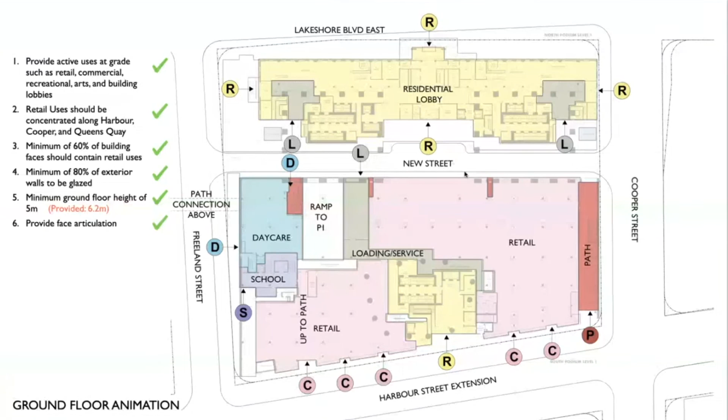Taking into account the neighbors, yes, because most of the Pinnacle development is aligned in the same north-southerly condition as these, so that sun would be coming in from the northwest in the afternoon. Peter, I assume that's the June 21st? I can't tell you exactly the time, but we can certainly do sun shade analysis and show you that in a more descriptive and detailed way. But yeah, you would get sun - you get a lot of sun in the northwest sky in the summer, right?

Hello, can you hear me? Patty, are you there? Yeah, I'm here. Can you hear me? Any questions? Yes, I have a quick question.

What is the width of the sidewalk on Freeland near the school, and how many students are anticipated to be attending the school? I'm sorry if I missed that in the presentation, or how big is the school being designed to accommodate how many students approximately?

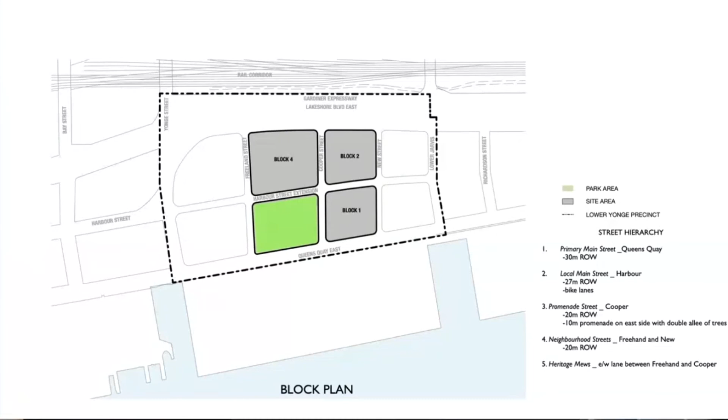And then the other question is the issue of this Heritage Mews. The path is on the second floor, and the public realm is on the sidewalk, and the streets are on the ground floor. So other than the escalators, which happen at the very south end of Block 4, is there no other connection? The public isn't really allowed into the elevators, so really this new public realm of the path remains very disconnected from the Heritage Mews at the street.

There's actually a connection at grade from the Mews that you can get into the elevator and access the path. Can you show me where that is with your cursor? I think Peter's highlighting that now. That's me, so right here Bridget, there's an elevator. Is it on the south side near the ramp? Yes, by the daycare, and then it takes you up to the path connection here.

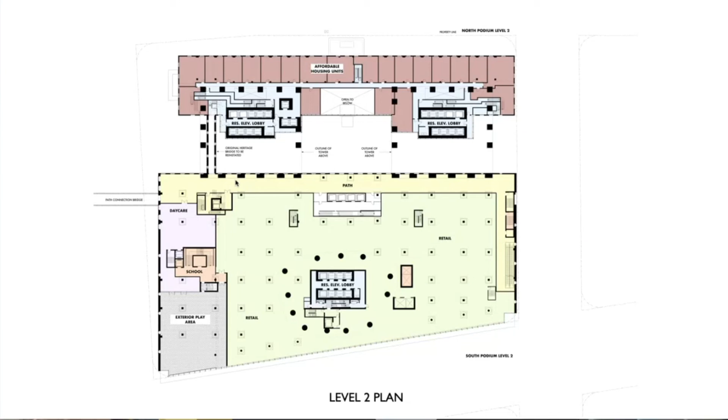And then my last question is that the retail that you have is really large. Could that potentially be a grocery store? Jude, do you want to speak to that?

We're looking at different formats as of late, because the retail landscape is changing day by day. We're trying to maintain maximum flexibility for potential retail tenants, but I can tell you it would likely not be a food store, because we're trying to secure a food store on Block 1 right now. So I can't elaborate on what type of retail this could be, because it's actually quite far along in terms of the retail cycle. But we've offered the opportunity for flexibility in leasing, and given the retail landscape we're currently experiencing, the utmost flexibility is important because we don't know what can be achieved at a later juncture.

Okay, thank you. Okay, Bridget. Yep. All right, Nina Marie.

Can you hear me? Yep. I only had a question about total number of people in the towers, and I think that was answered earlier, so I'm fine. Yeah, that's roughly 3,000 units, Peter, I believe. Yes, give or take roughly. Okay, thanks. Eric, please.

A couple of questions. One is the south tower - how does the pickup drop off happen there? Because I don't see any connection from the Mews.

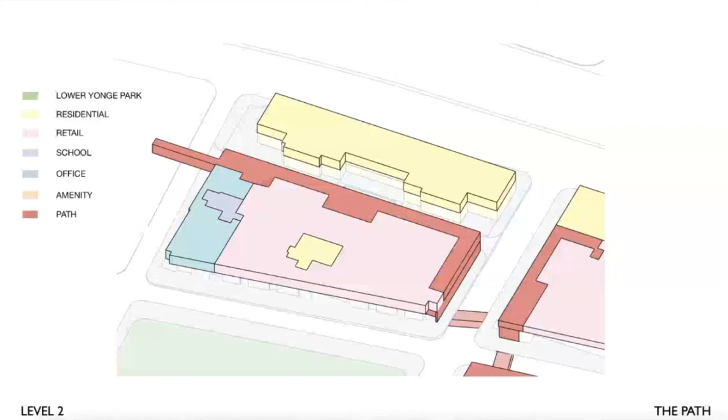On the facade along Harbour Street, I've heard that a few people like the treatment. I think there are personally opportunities for further articulation - there's a school behind, there's different functions, different uses. One of the things I found missing on the waterfront sometimes is having a finer grain of treatment on the facade. This is a very long facade, an entire city block with different uses. Something we generally miss in the waterfront is that the facade can actually be further articulated - maybe there's some color, maybe a different treatment - something that needs to continue to be explored.

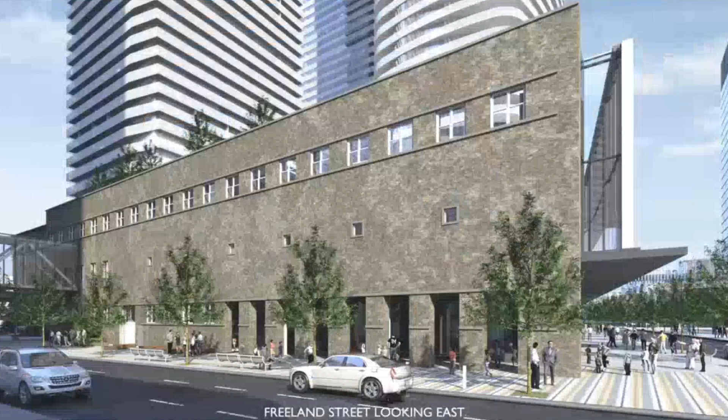The exit - and that's something that obviously needs to continue to be explored - the exit of the school, the entrance to the school, with the sheer number of people and kids coming out of the school, I think we could create a few more openings, enlarge some of the openings.

I know this is something that needs to be dealt with for heritage, but from a practical perspective, that might be something to continue to be looked at. As mentioned by Betsy, I would not be supportive of a bridge over Harbour Street. I think it's an at-grade crossing, and making it as safe as possible is more appropriate than having a pedestrian bridge over Harbour. So I'll leave my comment to that. That generally covers everything else that's been covered.

I think there's some really interesting opportunities when you walk into the school foyer, between where the small elevator is and the column, it'll be very difficult to get a stroller through there. I think if you use that space where that grand staircase is as the elevator, and get rid of the elevator there, you're starting to work with the kind of spaces you need when addressing groups of people. So look at the daycare and the school on all levels, and scrub it through architectural ideas about crush space, about group play and group movement. Schools and daycares tend to move people in large groups of kids with adults, not like a condominium amenity space of just 2 or 3 people.

Finally, I think there's a real opportunity to open up sectionally where the amenity space for the residential is on top of the institutional uses. There's a chance to sectionally puncture that relationship to allow more natural light into the floor space of the school and the daycare, particularly the school. It's a very difficult and deep section north-south, and you're going to be really hamstrung to get the adequate amount of light. I'd suggest you erode the residential storage space with all the back-of-house uses that a school needs, so you can open up the corridor spaces, the play spaces, and the interstitial meeting spaces for the school and daycare. I think that would make for a far more successful program.

I'd urge you to do it now, because frankly, I don't see how the daycare can become a daycare once you start adding all the requirements for plumbing and separate spaces for sleeping. I really urge you not to make it someone else's problem, but to take it on now, because I think that will positively inflect on the public space at the ground level. Thanks a lot.

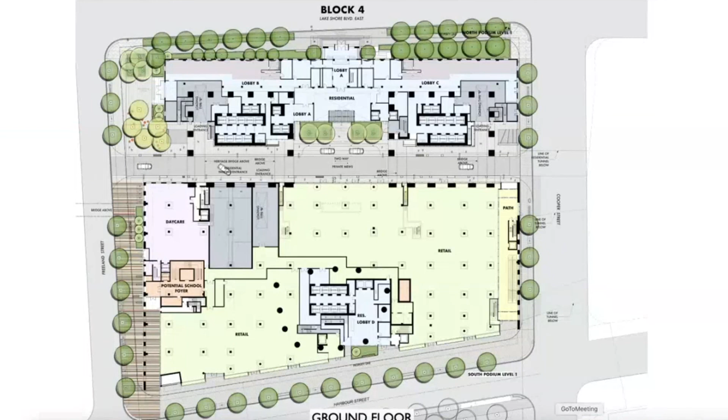When we're looking at our climate goals of being carbon neutral by 2050 as a country, if you look at a 30-year timeline of where all the carbon comes from, I'd bet half the carbon this building emits over the next 30 years will be the construction—maybe more. So there's a huge deficit we need to make up in this building typology, and it's very, very challenging with tall buildings to deliver efficiencies at this scale.

I think we need to start looking at how we compensate for those. There's some work that could be done to reduce that embodied carbon number—that's where I would focus my efforts. There's certainly more work that can be done on the energy efficiency side.

With the envelope, as Peter mentioned, it's not just about energy savings—it's about thermal comfort, mean radiant temperature, also balancing that with daylighting, views, and everything that makes a place livable. But with these really small units, if we're not factoring in radiant temperature, there are significant comfort and usability issues in the middle of winter and middle of summer.

Finally, when I talk about the economics, I go back to this goal that we have to be carbon neutral by 2050. The City of Toronto has a climate emergency, and TransformTO has been upgraded to be carbon neutral before 2050. So when we're talking about the cost to unit owners who buy these units, it's not just the utility cost—it's the fact that at some point they're going to have to invest in getting this building down to carbon neutral. Some of that will be done on the grid side through greening the grid.